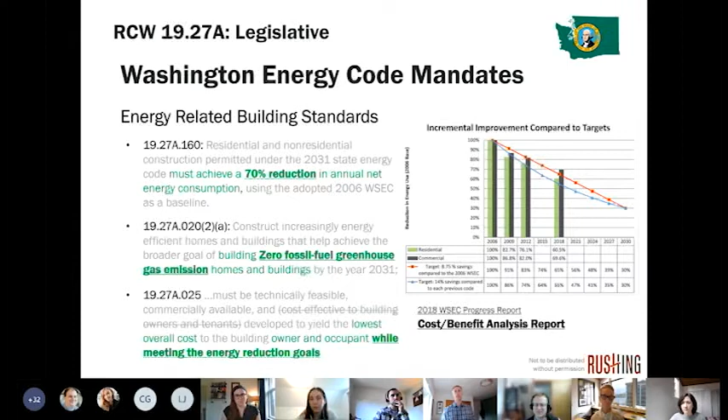So how are we doing on meeting those goals? We're gonna take a look at this. So we're in code cycle 2021, which is number 5 here. So we've had 4 code cycles since 2006, and we've got 4 more to go. And so we're behind schedule, especially on the commercial buildings, and we've got a lot of work to do. And one of the chief things that's hard with this is that we're trying to save energy for things we can regulate in the energy code and other things that we can't regulate. And so that's a significant challenge: how do you write a code that's going to save unregulated energy use in buildings.

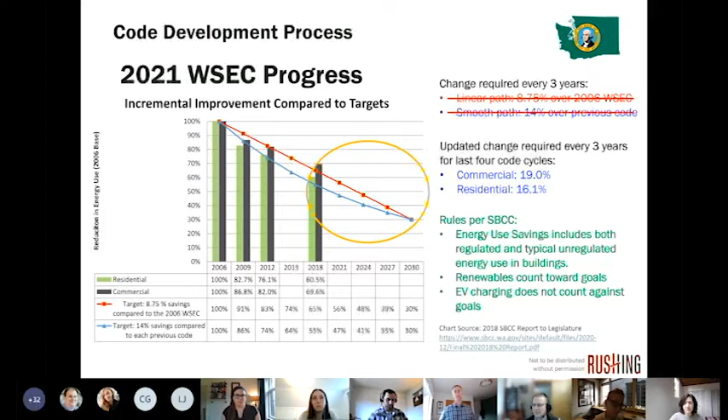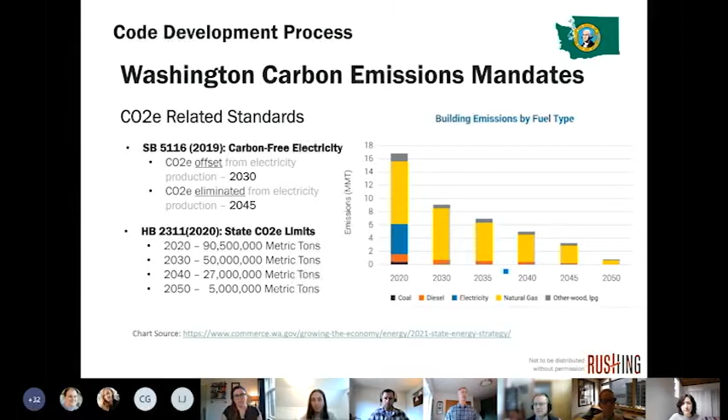Let's move on to the next slide. As we mentioned, this is both energy and carbon, and recently the legislature has developed a lot of initiatives towards clean energy, and we have clear goals that have been set by the legislature on the carbon side. So that's what we're working towards. So let's go to the next slide.

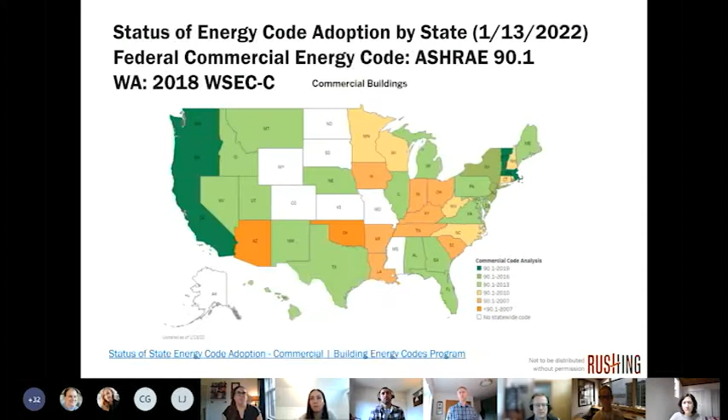So we know we're pushing forward faster, and we're seeing a lot of initiatives come through Washington to try to get them either into 90.1 or into the IECC code. So, huge emphasis in Washington with proposals coming in from around the country to move our code forward, to try to move the model codes forward. So with that, where are we at in the actual code development process for Washington State, and what happens next?

So we're about halfway through the process. This past June, code proposals were due to the state. A lot of us spent hundreds of hours in meetings this past summer debating code proposals. The council then reviewed those, and in December they issued what's called a CR 102, which is the public review draft of the code based on all the code proposals that have been submitted. So right now we're in the middle of this public comment process per the state mandate.

So last week there was the first public hearing on the code, and next Friday is the second public hearing on the code. So this is the opportunity in the next week, if you want to get involved and say that you love the code or hate the code, or it's not aggressive enough and we need to go faster. This is really your opportunity to jump in and get your voice out.

So what happens next? The council receives public comment, and then they make decisions on what they're going to do. And hopefully by about April of this year, they're hoping to have the Washington State Energy Code commercial code established. After that point, they're also going to be working on the Group 2 codes later this year, and they could make some correlation changes between the codes if needed. So by December 1, the council, per state law, has to pass a code. It then sits through the legislative cycle and goes into effect July 1, 2023.

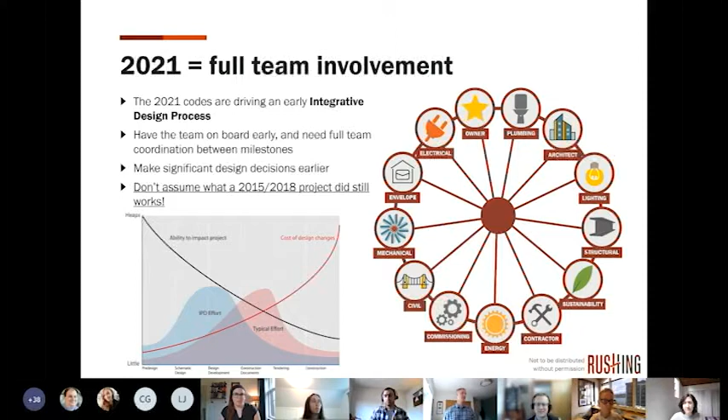So with that, Stephanie is going to talk a little bit about sustainability. Go ahead, Stephanie. Thanks. So great news is our Washington State Energy Code really does help us with our sustainability efforts across the board. It does focus on energy efficiency, but it does start propping you up for hitting some of your other sustainability targets as companies.

So something that we're also seeing more often is cities having incentives focusing on third-party protocols like LEED, like Living Building Challenge, to give you additional FAR bonus or additional height to the project. So we're seeing that, of course, with the City of Seattle Green Building Standard and Living Building Pilot Program, but we also see it in City of Shoreline, Woodinville, City of Kirkland starting to look at it, and a few other cities like Redmond as well. So you're going to start seeing more and more about LEED, Living Building Challenge, and how you can start leveraging those third-party protocols to get additional FAR and bonuses.

So on top of that, operational and embodied carbon are starting to have bigger effects and go into your environmental, social and governance goals. So a lot of third-party financing you can get by actually going above and beyond just those third-party protocols. And then the last two things I wanted to mention on the slide are that climate change, resiliency, and health and wellness are starting to become bigger topics in the sustainability world. Those topics are hours and hours of conversation, but you're starting to hear more and more about them. And cities and jurisdictions are starting to look at folding them in within the requirements for code.

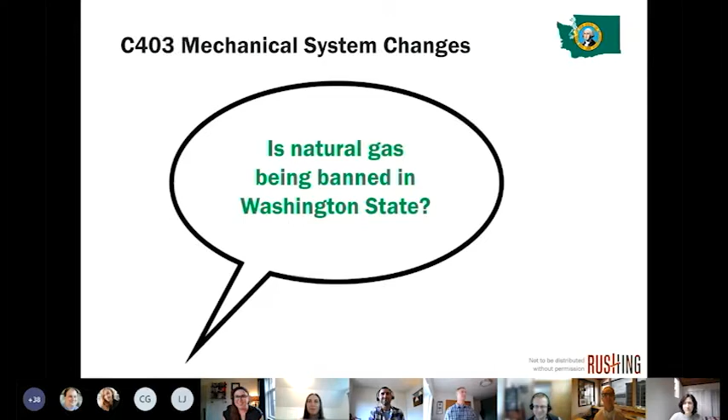So the first question that we have out here is: is natural gas being banned in Washington State? So Reed, take it away. Hi, everybody. Reed Rushing here, principal with the mechanical group. Yeah, lots of discussion on whether gas is being banned. And basically, the short answer is what we're seeing in Seattle under the 2018 code is being carried to the 2021 Washington State code. So it's not an outright gas ban.

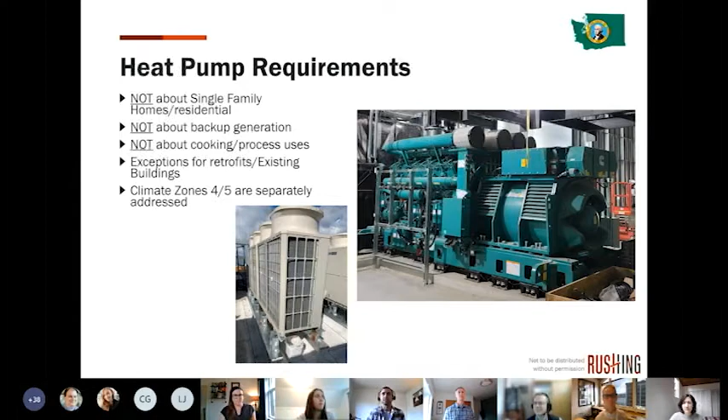It does mandate heat pump heating for space heating. It's part of the commercial code. It doesn't apply to single family homes or townhomes. It doesn't apply to backup power generation. We can still have gas cooking, and there are some exceptions for electric resistance heating. And then there's new language in the code that differentiates some of these requirements between climate zone 5 and climate zone 4.

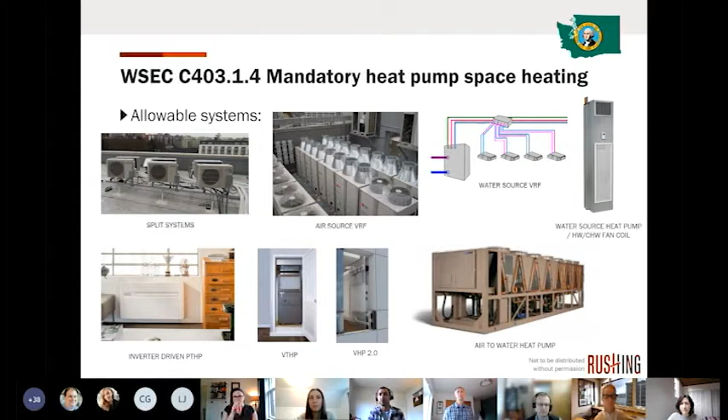And so when we talk about heat pump space heating, what systems are allowable? We're all familiar with a lot of these on the screen: split systems, VRF, PTHPs. Where the big impact comes into play is when we get into water source systems. So water source VRF, heat pumps, hot water, chilled water fan coils. The big impact is that what used to be a gas boiler is now large air-to-water heat pumps. And this slide illustrates what that impact is. There's prescriptive sizing under the new codes that we have to provide the majority of our space heating with these air-to-water heat pumps.

And this is a case study for a 55-story multifamily project, so a large high-rise building. 2018 on the left-hand side, we had a smaller air-to-water heat pump for some energy modeling efficiency. But now moving to a full heat pump plant, you can see the pretty dramatic space impact up on the roof, and we wouldn't have actually had enough roof on this project for the amount of heat pumps required. So you can imagine roof coverage impacts, acoustical impacts, obviously cost impacts to be considered. And so that's the main Washington State mechanical direction that we're headed.

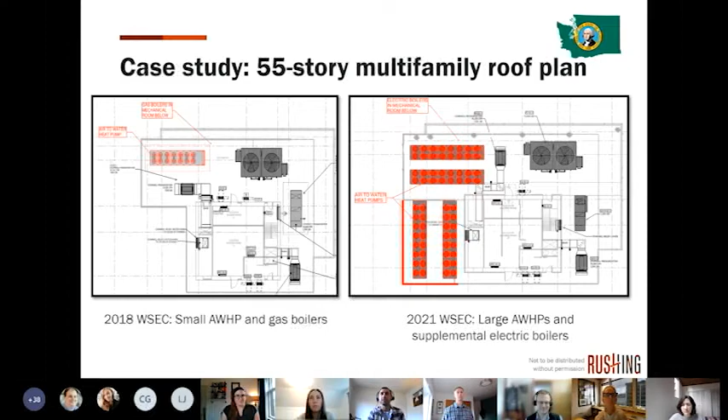And I'm going to pass it to Nathan to talk about some of the district energy changes. Hi, everybody. Nathan Miller with Rushing's Energy Group. This is a pretty exciting slide. I'm not expecting you to read it all.

The gist of it, though, is that this is an example where not all changes in the energy code are making things more restrictive. Instead, for example, what we're highlighting here is there's now opportunities to take advantage of connecting buildings to what's being defined as low carbon district energy systems, such as those providing hot water, chilled water, or condenser water, allowing buildings to share energy between them. And then have paths in the code where you can take credit for that and maybe use that credit to make compliance easier in other areas of the design.

So it's pretty exciting that this is in there. It's looking at energy use beyond just the footprint of an individual building and helping us really incentivize district designs that are more efficient, multi-building designs that are more efficient.

So Nathan's being too humble here. I mean, Rushing helped sponsor this proposal, worked on it. This is a very innovative idea; it's not in any of our model codes. It's not in 90.1. It's not in the IECC. And it's a way that we saw that we could help push buildings forward, so we're not just treated as purchased energy from these high efficient, low carbon district energy plants.

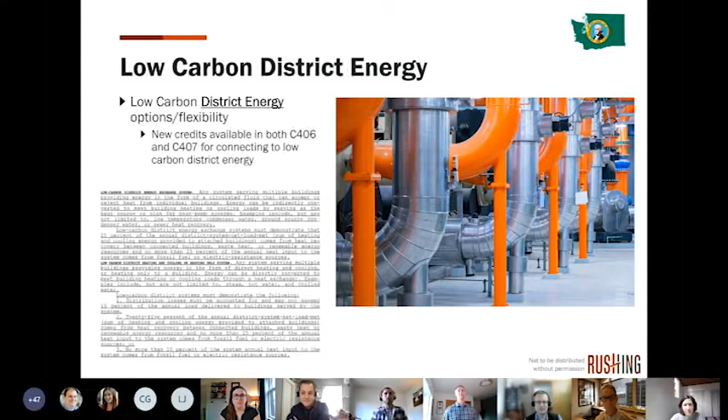And if you want a specific example, this would, for example, allow a project that is a net heat rejector, like a data center that is constantly dumping heat, to then get some credit within the energy code for actually connecting to a system and sharing that heat with, say, an adjacent residential building that more often than not is demanding heat. Specifically, an existing data center building, old downtown Seattle, and a new residential high rise, et cetera, right? Yeah.

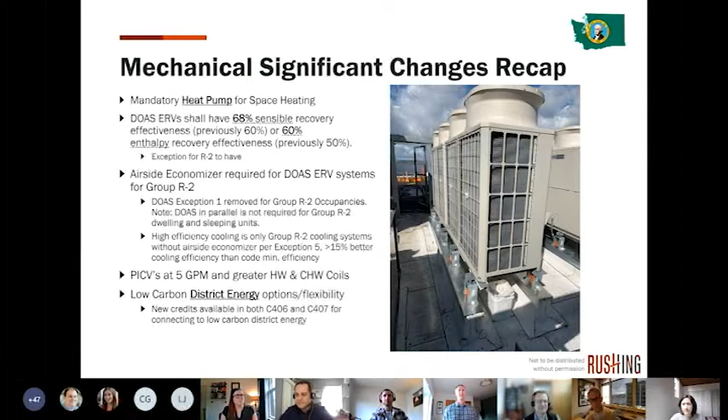So yeah, like we've heard, there's a lot of changes in the mechanical code. There's a lot of little things that we're not going to talk about today, but we're going to keep plugging through some of the significant changes here. So Stephen's going to talk a little bit about plumbing systems. So Stephen, can we still use gas water heaters?

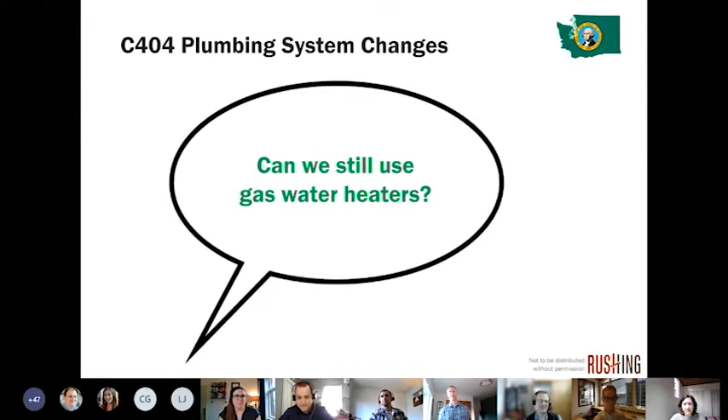Thanks, Eric. For those that don't know me, I'm Stephen Huff, manager of the Plumbing and Fire Protection Department here at Rushing. So the short answer here is maybe, or maybe not. There's actually two different options that are being put forward right now regarding water heating for the state of Washington. And actually, Eric, I think you had some fresh intel on what's going on between these two options. Can you tell us a little more?

Sure. So option one is very similar to what we have in our code that allows high efficiency natural gas boilers, and also has options for heat pump. Not a lot of options for electric resistance heat. Option two is the more aggressive proposal that's similar to what we have in City of Seattle. And through the energy code TAG process, option two was the recommendation from the TAG to move forward with.

There were minority reports from a minority position, mostly the natural gas industry, pushing for renewable natural gas as a viable option for the future. And so they're really supporting option one. So the council moved this forward with two options in the public review draft to try to get input on this from stakeholders around the country.

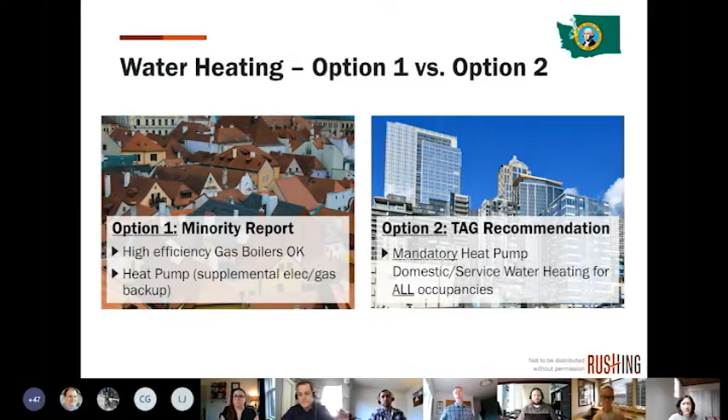Like I said, there is the cost benefit analysis if you want to dive deeper into this, and there has been public comment specifically on this topic. A lot of it's coming from hospitals and other users that don't think they can go to full electric buildings at this point. So Stephen, you want to talk a little bit about specifically what option two entails?

Yeah, thanks, Eric. So option two, which is the mandatory heat pumps, is basically going to be following the Seattle rules at this point. So it will be heat pumps for everybody. If you've got residential, R1, R2, or if you're something different, you're going to be required to use heat pumps as a mandatory version for your water heating. The technology is going to allow you to use standard air to water heat pumps, water to water heat pumps.

I think we'll start seeing more with the heat recovery type heat pumps, such as sewer thermal. There is an exception in there that's been put in as well for district energy. So if we've got an existing district energy system, something like Seattle Steam in another jurisdiction, then that would be allowed so long as it's existing before this starts going on.

Electric resistance is still going to be allowed for backup heating, and there are exceptions that are going to be in the code for limited use of electric resistance for small areas of the building. But what are the impacts? Well, just like we're seeing in Seattle right now, it means there's going to be more space required, more equipment, more expensive equipment. And so we're going to be taking more space, indoors or outdoors, probably about double the square footage that you'd see for a traditional boiler system.

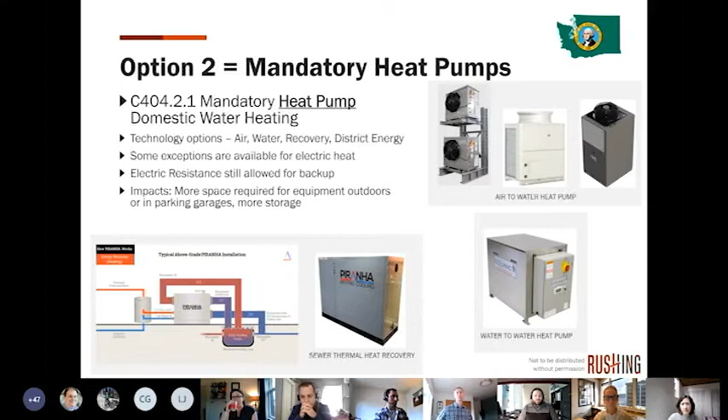Go ahead, next slide. All right. So a couple of other fairly significant changes we wanted to highlight. Again, we're taking a lot of Seattle rules statewide. So a big one is the insulation on piping. One of the favorites that came out of Seattle in 2018 was the requirement for an additional 1 inch of insulation on hot water supply or return piping beyond what's required in the code tables. That is being proposed to be taken statewide now. So unfortunately, that extra space is going to be needed in ceilings and potentially walls.

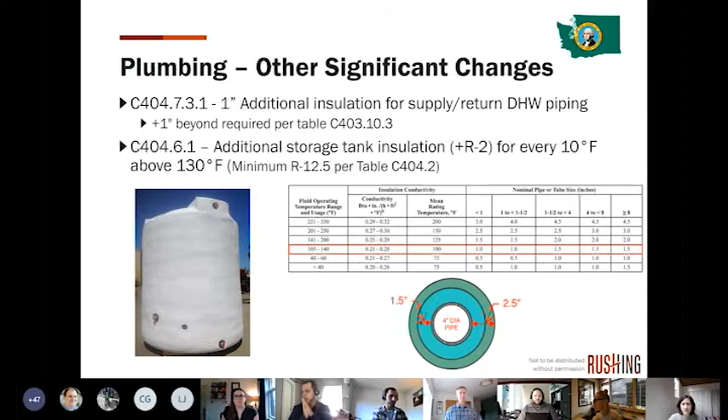Another one is storage tanks. So right now, per table C404.2, you have to have minimum R12.5 on your domestic hot water storage tanks. There's a proposal here that for every 10 degrees of storage temperature above 130, you would have to add R2 insulation to the tank. So for example, if you're storing at 140, you'd have to have an additional R2 insulation beyond what's required by code.

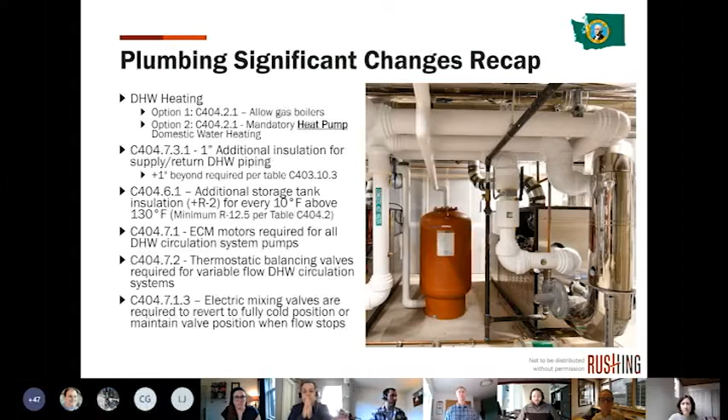Next slide. So it's just kind of a recap here as well. We've talked about a couple of these. There are some more high level items that are going on to the plumbing. We're going to be sending out these slides. We'll let people take a look at them. So next up is going to be Andy, and I'll ask the question for her. So Andy, are outcome-based energy codes the only option for energy code compliance now?

Andy Burnham, I'm the manager of our energy services group here at Rushing. We've still got 2 typical code compliance pathways, prescriptive and energy modeling. So we still have the same overall compliance pathways, but there's a number of pretty significant changes to how those sections are set up in the requirements. So C406 is the prescriptive additional efficiency credits section. That's gotten incrementally more complex, but also incrementally more flexible.

In 2015, it used to be you pick 2 credits off the list and they apply to your building and you're done. What we've seen in this last 2018 code cycle that we're currently in, we now do this area weighted average calculation, and we have to get to 6 or 8 credits for state and Seattle. And what's new is we're kind of throwing that point system out the window and going to a carbon metric where PNNL has done a whole energy modeling study to benchmark these credits to actual savings numbers. And then you have to get a different number of points based on your building type, same area weighted calculation. So it's a significantly more complex calculation. But as we'll see on the next slide coming up, there's also way more credits to pick from.

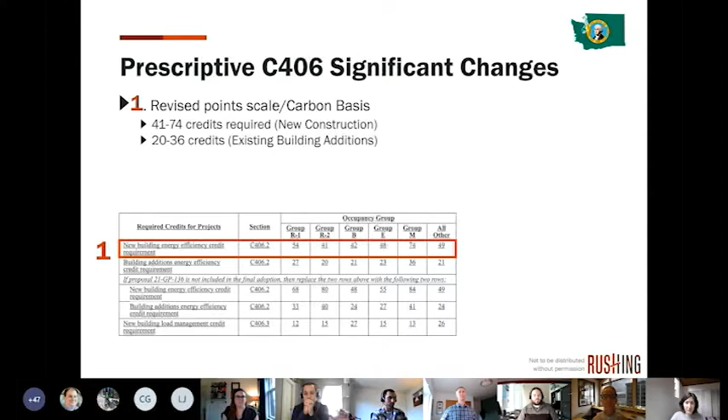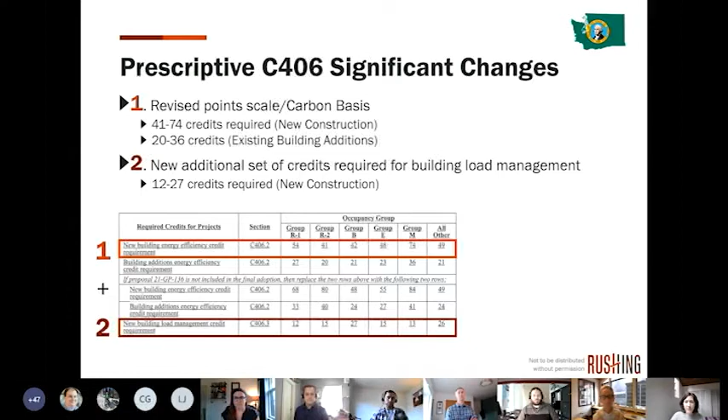What else is new is we've added a second C406 package for load management credit. When Nate was talking a little bit about the district energy proposals looking beyond building footprints, that's a bit of a trend within this 2021 batch of proposals, thinking beyond just building footprints and neighborhood connectivity, thinking about grid management, load connections, those sorts of things. So now there's 2 C406 credits we have to achieve. They're based on carbon, but there's also many more options to pick from. You can see we've got 31 different credits. In the 2018 version, I think we've maybe got 12. And then for these load management credits, we've got 7 to pick from there.

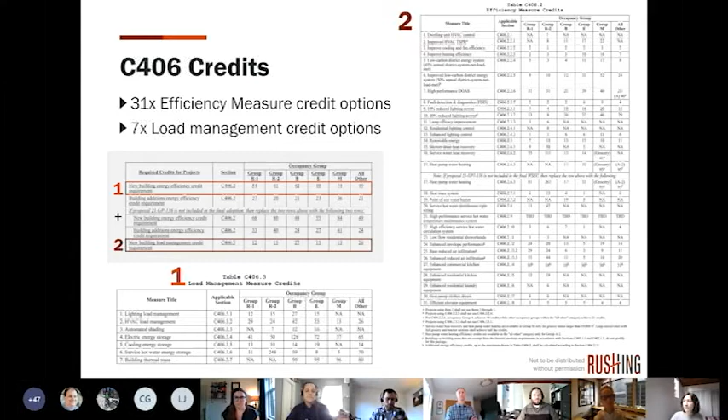C407, the energy modeling requirements, some other pretty big changes there as well. We had some major 2018 modifications, so that's all carrying forward. We're still doing the 90.1 static baseline approach. What's new is we've increased the stringency on the building performance factors by 10%. That's in line with what Seattle's amended for 2018.

That building performance factor only applies to regulated energy uses in buildings, so lighting, fans, major equipment. What's new is similar, we're adding a second metric. So we still have to do that building performance factor compliance, we now also have to show compliance with an overall site energy metric that accounts for both the regulated and unregulated energy. So that's including plug loads, server equipment, all of that type of thing.

And that metric is not related to here's a target set for your building type. It's tied to just the straight mandated legislation of we need to achieve the 70% reduction by 2030. And it does allow for offsets with either offsite renewable energy credits. So that's a new layer of complexity to the energy modeling pathway.

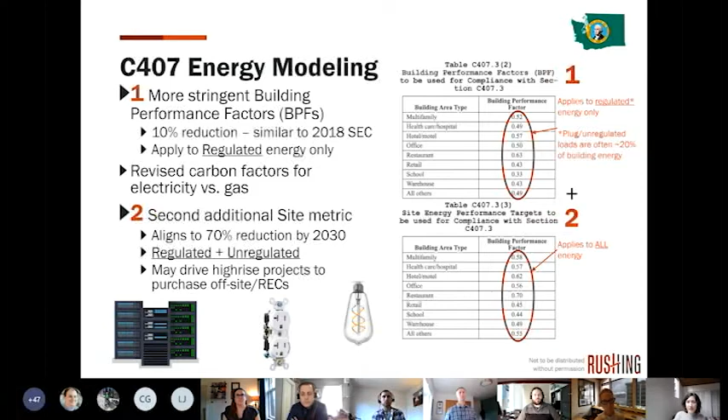We're going to jump into some electrical changes next. So Nick Rich, can you tell us about on-site PV requirements for projects?

Probably the primary exception is where we've got 80% of the roof area covered by, say, a combination of our mechanical equipment, planted or vegetated areas, skylights, occupied roof decks, that sort of thing, where that's basically taking up a big portion of our roof area. And I want to pop in and just say that is kind of an interesting exception that is included. There's also an exception for if 50% of your roof is shaded, for example. So there's some practicality exceptions built into the current proposed language.

But just as a reminder, you may still need to do some sort of either on-site component or look into an off-site REC exception, again, tying back to that C407 new metric. So this is just to satisfy the C411 requirements, but just a quick reminder that that doesn't mean projects might be totally off the hook, and it does need a holistic review of what else is at play here to come to that final decision.

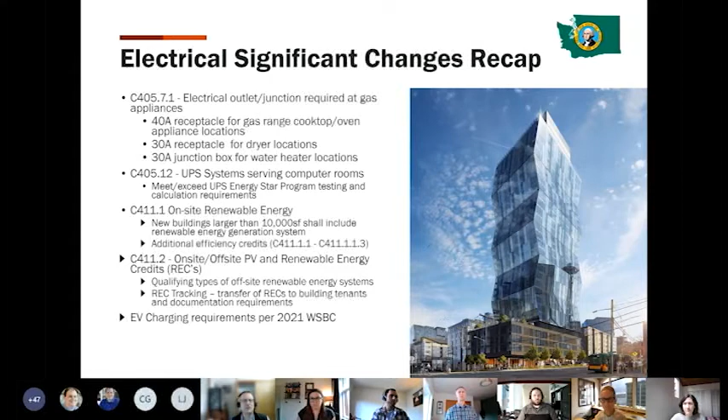All right, we talk electrical. There's so much fascinating on the electrical, the lighting part of that. So does every interior luminaire require an occupancy sensor? It seems like we're moving that direction. And with that, I'll turn over to Emily.

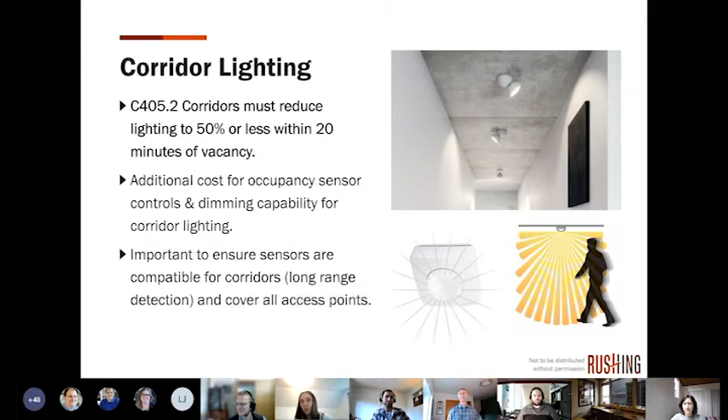Corridor lighting is one of the last items that was previously in some exceptions that is now requiring occupancy sensor controls. So that's a new thing: it needs to dim to 50% or less after 20 minutes of vacancy. This will be an additional cost, obviously, for additional controls. Also need to consider dimming capabilities for selected luminaires in the corridors.

And it's also important just to ensure that the sensor placement is going to have to be more regular in the corridors and other spaces. So that also kind of adds to the cost impact. Another change that we're seeing in 2021 is something that we saw in the 2018 Seattle, which is offices greater than 5,000 square feet require either LLLC or enhanced digital lighting controls.

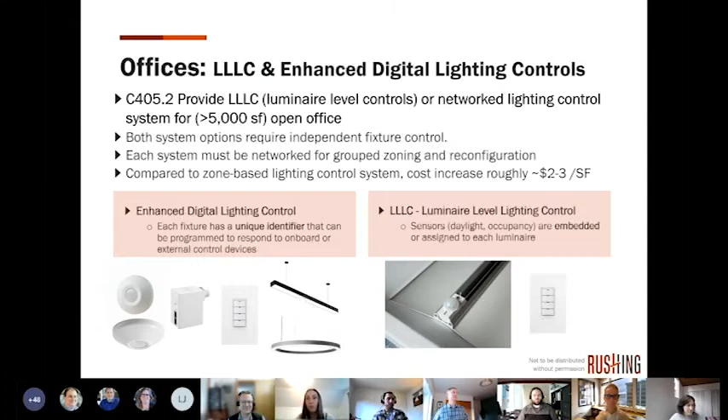Both of these systems are essentially fixtures that work as independent controls. So either it has a unique identifier for each luminaire, or there is a sensor or identifier embedded into the fixture. So just different methods of controlling them independently. We bring this up here because it is just in offices, but if I had a crystal ball, I would see that being a trend for future code cycles and more spaces than just offices. So just something for you to be aware of in these types of control functions.

Is triple pane glazing going to be the norm for highly glazed buildings, Andy? Thanks, Emily. All right, so envelope changes: not too many significant changes in terms of the language in the proposals, but potentially high significant impact.

So there is still the envelope UA limit required, even if you're doing an energy model. That's a requirement that was introduced in the 2018 code cycle. That hasn't changed. It's still a 20% UA allowance. So that UA is the whole building heat loss calculation that we have to do. So we're limited on how much envelope performance we can trade off with our energy model.

But what has changed is that the glazing U factors that the baseline compares to have gotten more stringent. What that is going to functionally do is lower those thresholds of how achievable certain glazing percentages are without additional investment in system performance.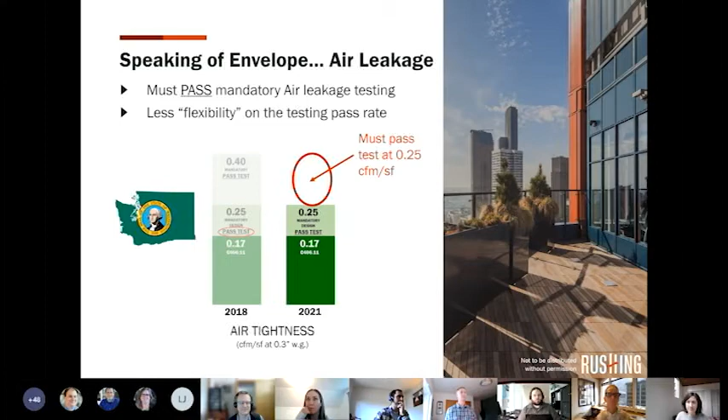The other major envelope change: whole building air leakage has been in the code for many code cycles. This isn't new. 2018 did introduce the new mandatory passing of the air leakage test, but it gave a little bit of fluff that you could pass up to a 0.4. That fluff is removed, and now you have to pass at the 0.25 CFM per square foot target. There's some other changes, but those are kind of the main ones. So I'm going to kick it over to Eric to tell us a little bit about existing buildings.

Okay, thanks, Andy. I know we've kind of been on rapid fire here, but we're going to quickly have a couple more slides to run through and then open it up to some questions. So existing buildings, chapter 5: if you're doing a lot of work in TIs or existing buildings, there was a lot of emphasis in code proposals around addressing existing buildings. And there were some attempts to get substantial alterations type proposals similar to what Seattle has into the state code.

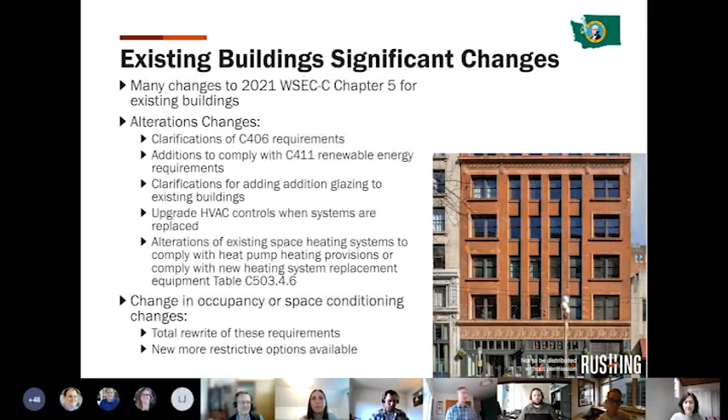Those were not able to get in this code cycle, but there has been a lot of rework as to clarifications of how to comply with C406, additions having to comply with C411, and other things. So go ahead and take a look at that chapter. There's a lot of brand new code language that we just don't have time to go into today, but just want you to be aware of that. Skip to the next slide.

So as we mentioned, where we are in this process, the group 2 codes are just starting into development. So the TAGs have just started meeting. Group 2 code proposals, which include the IRC, the mechanical code, the plumbing code, and the Washington State Energy Code residential buildings, three stories and less and single family homes, are due in April. So if you're looking to submit code proposals for that, it's just a month or a few months away.

And then we want to just briefly mention refrigerant regulation changes. Those aren't covered by either the building code, the mechanical code, or the energy code. That's regulated by the Department of Ecology in the state. And we have adopted requirements for next generation refrigerants for both insulation manufacturing processes and some HVAC equipment. So starting in 2024, chillers and air to water heat pumps need to be using next generation, low GWP refrigerants. So whether you're a 2018 code project or a 2021 code project, you have to comply with that based on the manufacture date of the equipment. So make sure that you're designing accordingly right now and checking out those requirements.

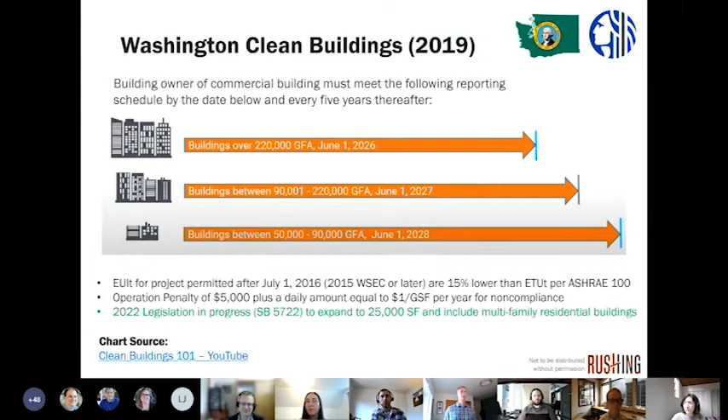So as we talked about, I think we're just going to skip this slide and move straight into questions. As we mentioned, we have about 15 months left with the 2018 codes. So we're trying to get word out that if you're trying to grandfather your projects under the 2018 code and not build things similar to what you're building in Seattle right now, for jurisdictions outside of Seattle, make sure to check those requirements with the AHJ and keep those projects moving into design to hit those targets.

If you're going to provide public comments, we have another week to get those into the state. We can help direct you on how to do that. That can be showing up to the meeting next Friday, or sending in written comments to the council. So from there, does anybody have questions or things that we want to address right off the bat? I know we got one question through the chat. Yes, we'll be sharing the PowerPoint.

So let's see, what's Dan's question? Penalties for continued use of natural gas. Well, right now we just have operational EUIs for existing buildings that we'll have to hit. The penalty may be utility bills. The cost of natural gas may change with less use as we go to all electric buildings. For the replacement of natural gas in existing buildings, there are some similar proposals, I think, for replacement equipment, similar to what the City of Seattle has. But yeah, we'll have to check out those Chapter 5 requirements there.

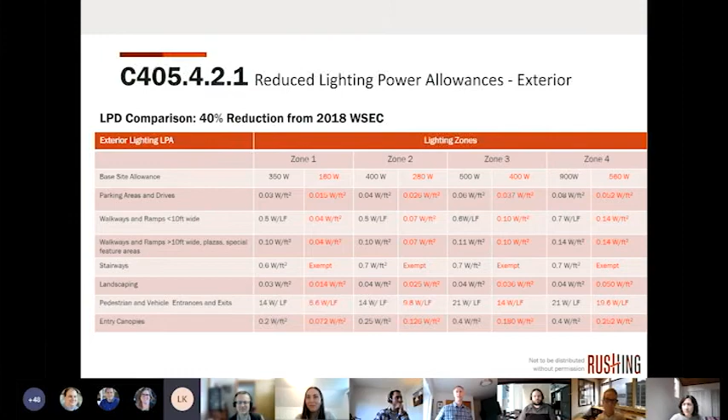What other questions are out there? Is everybody able to unmute and talk now? Hey, I've got a question for Emily. Are there going to be reduced LPDs for Washington State Energy Code, Seattle Energy Code, based on the 2021 cycle for lighting? Yes, there will be, and it's kind of a mixed bag of some reduction and some not. Where you're going to see the most reduction is in exterior. It's about 40% reduced. Great. Thanks. I must have missed this slide. I was a little late. Perfect. Wonderful. Well, I think we skipped a few slides to fit everything in.

Also, just to mention, Seattle has not started their process. They will probably start after April, when the code settles down a bit, and hopefully we get a solid draft out of the State Building Code Council. The fire code did just start. We meet next week. Let's see, what other questions?

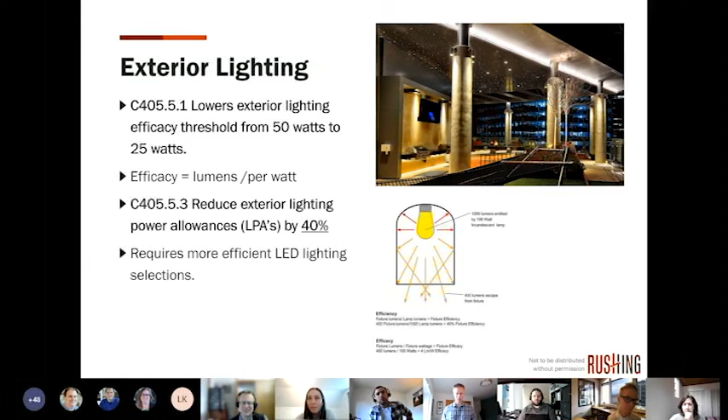Has there been any discussion on the use of photovoltaic curtain wall panels? Yeah, again, the code doesn't mandate the type of renewable energy or how you do it, whether you want to do that vertically in your building or horizontally on the roof. It's just requiring a certain amount of renewable, this 0.5 watts for the entire building square footage. And now we have off-site versus on-site, and then the REC option. So lots of options, but this is the first time the state code is requiring renewables.

Seattle's had that for a while, and so they're going pretty deep into renewables to help address the plug loads and other loads in the building that aren't regulated. So, what else do we have for questions here, Andy? Yeah, let's see. I saw a question come in on how long do the RECs need to be purchased for. There is some language defining the RECs. I don't have that right offhand, but that is defined within the C411 proposal.

There's a question about substantial alterations in Chapter 5. That's a Seattle only requirement still. That language did not get into the state code. There were several code proposals, but it's just a really hard thing to enforce in existing buildings, and a way to write it that the 150 different cities and counties in the state that enforce the code could enforce was not contained in the proposals that were submitted, so they were not accepted.

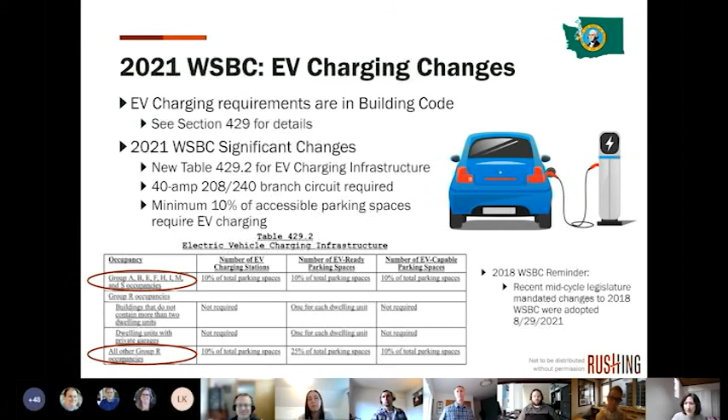15 years for RECs. You got that, Andy? Yeah, and I was also going to paste in the language that defines quality of REC. That's back to this point about increased flexibility in exchange for more complexity. That's a big piece of it, within these renewable energy factors: where the offsite array is located, what is the quality of the REC. Is it just a PPA versus a community solar that you've bought into? There's all sorts of other aspects here. So more complexity, more flexibility. That's kind of been my key takeaway from a lot of these proposals.

And to Eric's point, maybe someday we'll get to just the outcome-based code where there's no complexity and you just have to hit your EUI target or your carbon target, but we're not there today. Well, in Seattle, that is an option. It's an option in Seattle, but it's not required, and they still make it a little harder than I personally think they should. But that's just Andy Burnham's personal opinion. Or it might get to a point where energy costs are just really high in the state, and then all this makes sense.